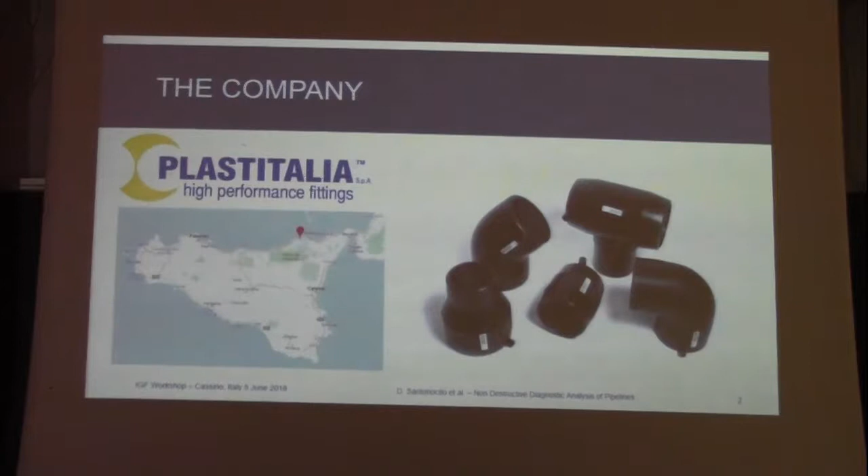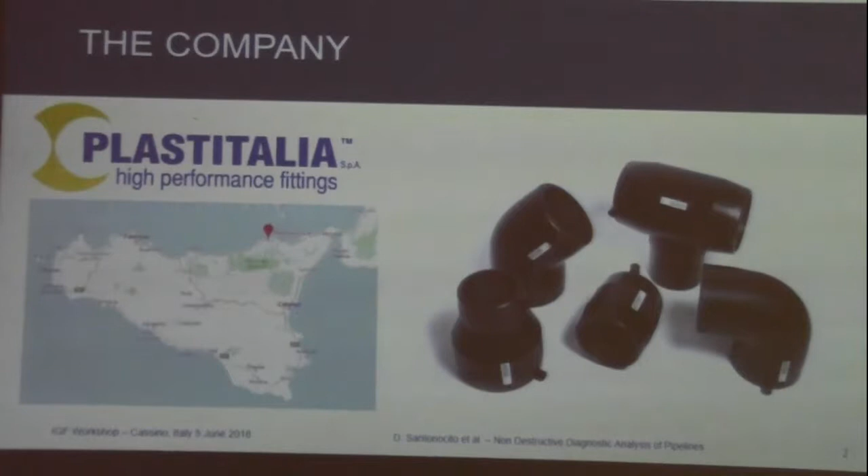This work is made together with a company, Plastitalia. Plastitalia is a European leader in the design and manufacturing of fittings for pipelines of water and gas distribution. Its headquarters is in Brolo, Messina.

The aim of our study is to specify a design strategy to avoid leakage on flange joint coupling, because we have a flange joint with different materials: the stub made with polyethylene 100 and the flange made in steel. So we have the coupling between different materials, and also the changing over time of the mechanical properties of the polyethylene, and also a possible fatigue effect due to the changing working pressure condition of the pipeline, for example ram effects, that can affect the property of the pipeline and also of the flange joint.

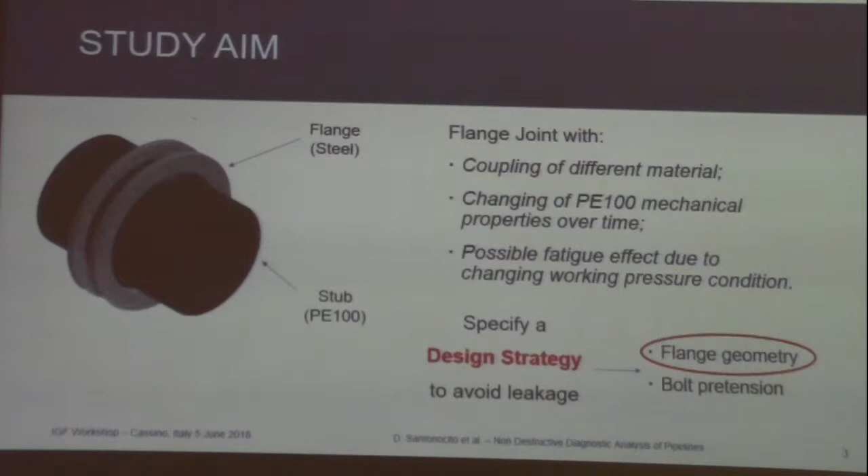So the design strategy had to state the flange geometry and also the bolt pretension. Today I will focus on flange geometry. There are a lot of reference standards that tell us how to design a flange joint, but none of these standards tell us how to design a flange joint with mixed materials. So there is the problem of how to design this mechanical coupling.

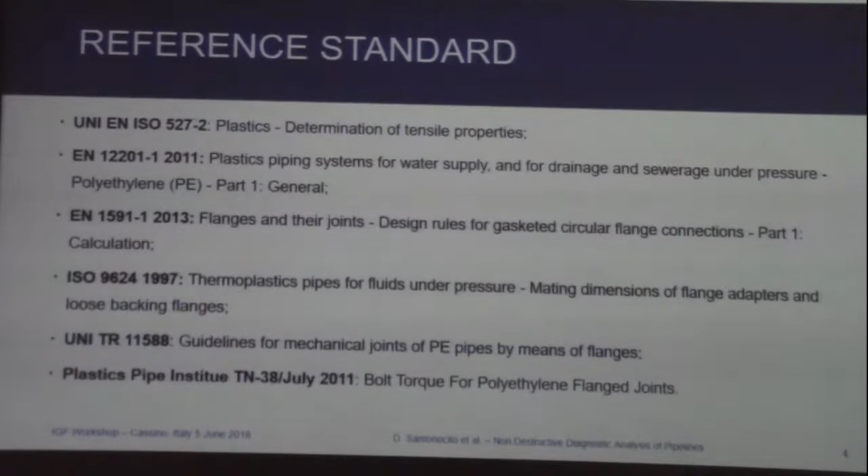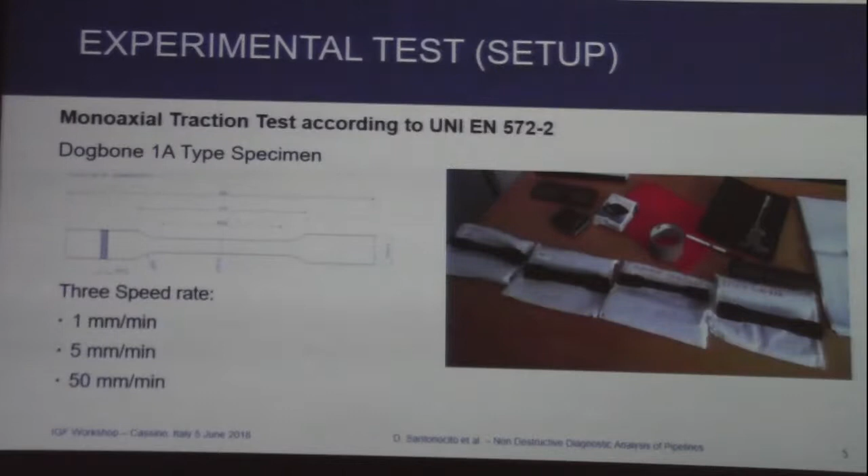In the first part of our study, we carried out a monoaxial traction test according to the standard UNI EN ISO 527 part 2, using a dog bone 1A type specimen and using speed rates of 1 mm per minute, 5 mm per minute and 50 mm per minute. We carried out our tests with 4 types of polyethylene provided by 4 different manufacturers: Eltex, Borsafe, Hostalen and Sabic Vestolen. We used a test machine Ital Sigma 25 kN.

Each set of specimens per manufacturer is composed of 11 specimens. 4 tests were carried out at 1 mm per minute, 3 tests at 5 mm per minute, and 4 tests at 50 mm per minute.

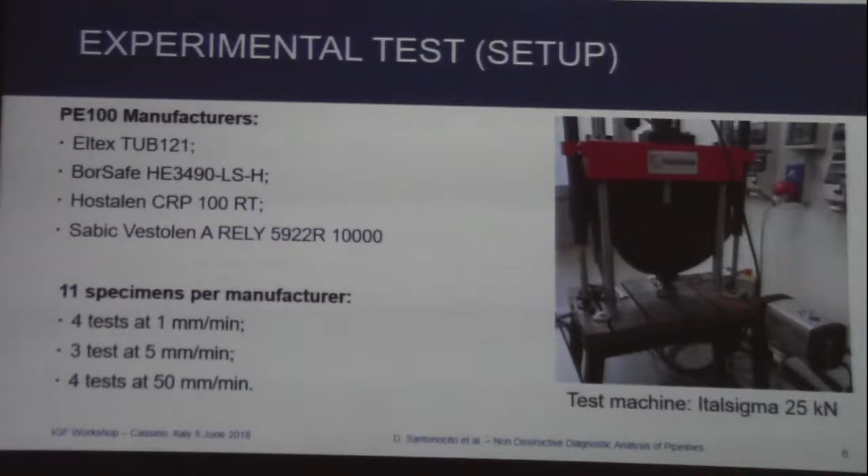In this table there are the test results, where we can see the different speed rates and the values we obtained of the Young modulus and the yield stress. A set of tests was conducted at the laboratory of the University of Messina, the other one at the Plastitalia laboratory.

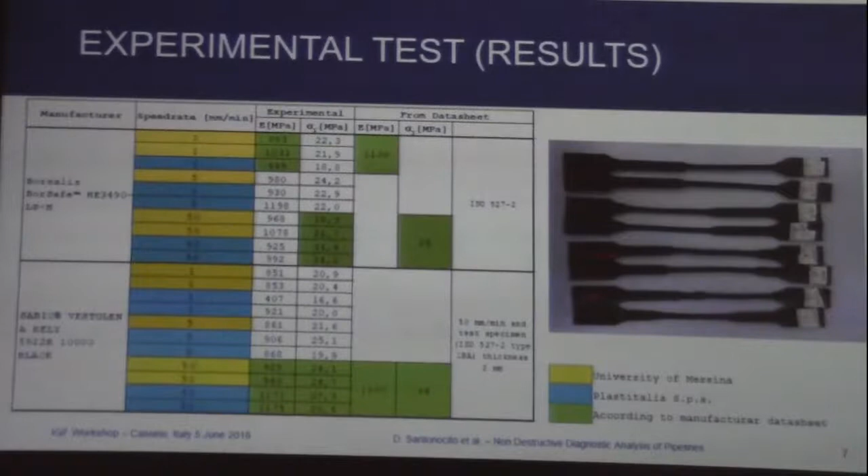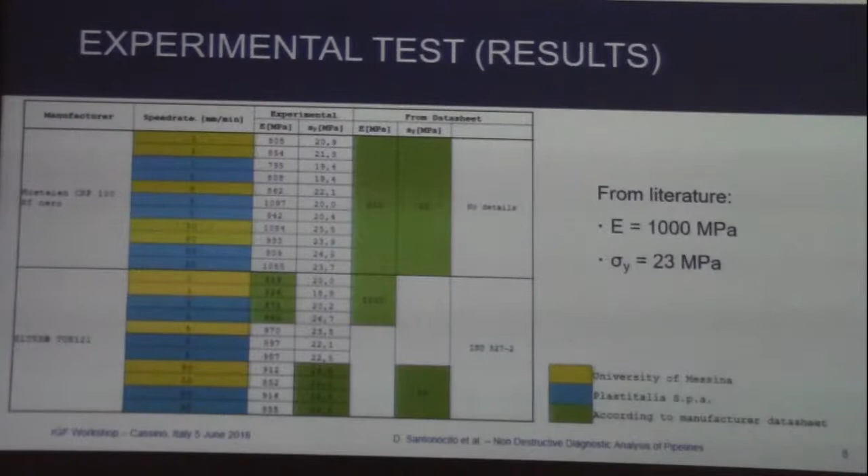As we can see from the green cell, we have the value according to the specific data provided by the datasheet of the manufacturer. Some manufacturers provide the standards used to make the test. Someone else, like Hostalen, didn't provide any details about how the test was conducted. From literature, we have a Young modulus of 1000 megapascal and a yielding stress of 23 megapascal.

As we can see from these charts, the higher the speed rate, the higher the value of the Young modulus and the yield stress, for all four manufacturers.

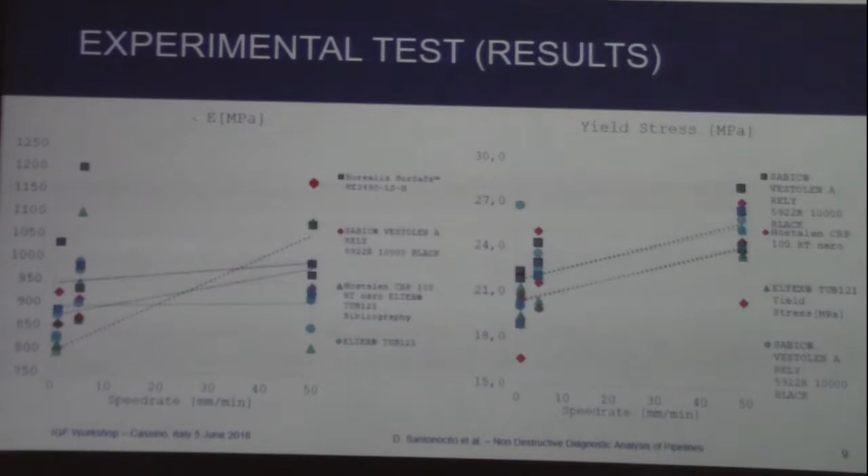Here we have a comparison between the literature data of the Young modulus and the experimental Young modulus we found in our experimental test. As we can see, there is an appreciable data scattering between the values. The same with the yield stress.

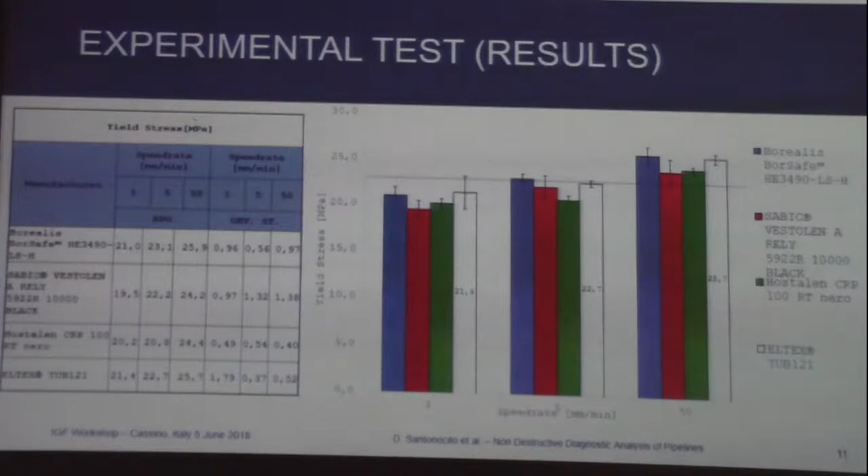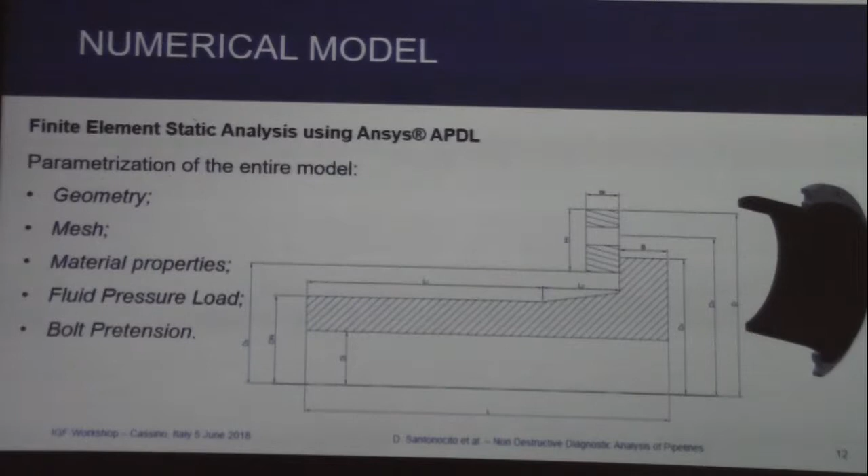In the second part of our numerical model, a finite element static analysis was conducted using ANSYS APDL. We realized an entire model with parametric geometry, mesh, material properties, and also parameterized external loads, like fluid pressure load and bolt pretension.

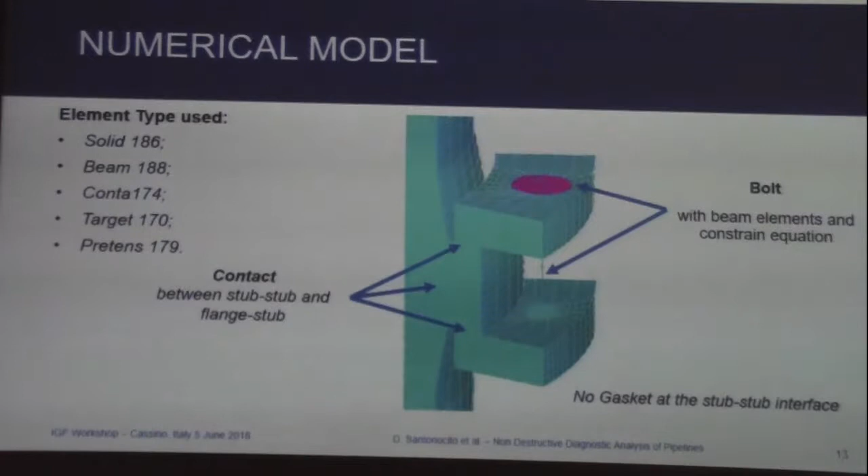We used several types of finite elements, like solid 186 for modeling the stub and the flange solid part, beam 188 for modeling the bolt, contact 174 and target 170 for modeling the contact zone between the stub and flange contact, and at the end, the Pretens 179 to model the bolt pretension. No gasket was modeled at the stub interface.

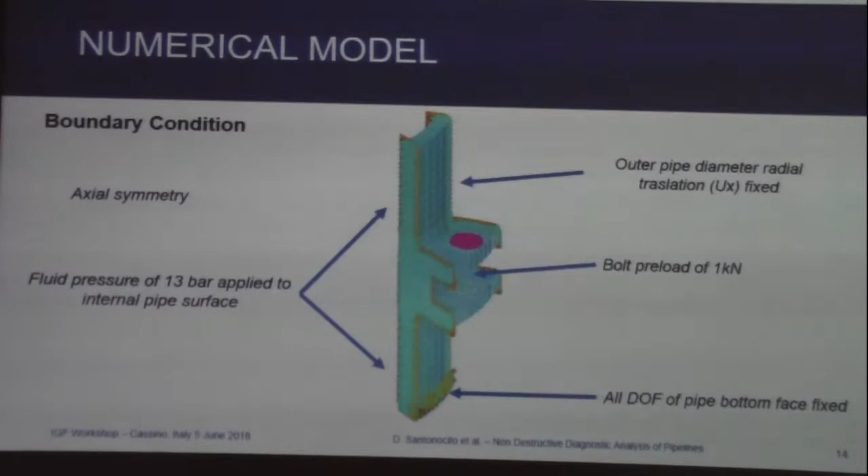Regarding the boundary condition, we took advantage of the axial symmetry of our structure. We applied a fluid pressure of 13 bar to the internal pipe surface in order to simulate the ground behavior. We fixed the radial translation of the outer diameter pipe, and also fixed the bottom face nodes of the external pipe, and then we applied a preload of 1 kilonewton.

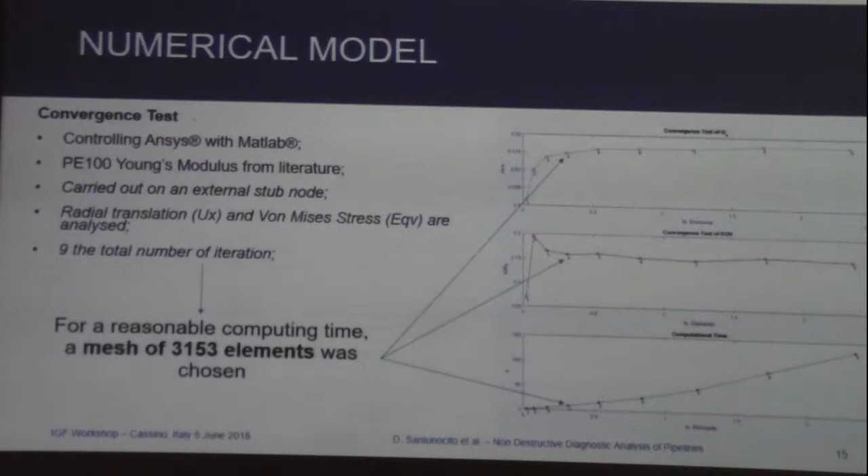Then we made a convergence test, controlling ANSYS using MATLAB. We used the Young modulus provided from literature data. The convergence test was carried out on the external node of the stub surface, and we analyzed the radial translation and the von Mises equivalent stress. We carried out a total of 9 iterations, and for a reasonable computing time, we used a mesh of 3,153 elements, with a computational time of about 20 seconds, in order to reduce the computational time of the overall iteration procedure.

Later, a sensitivity analysis of 3 geometric parameters was conducted as suggested by the Plastitalia technicians, in order to investigate the influence of the geometry parameters on the behavior of the model.

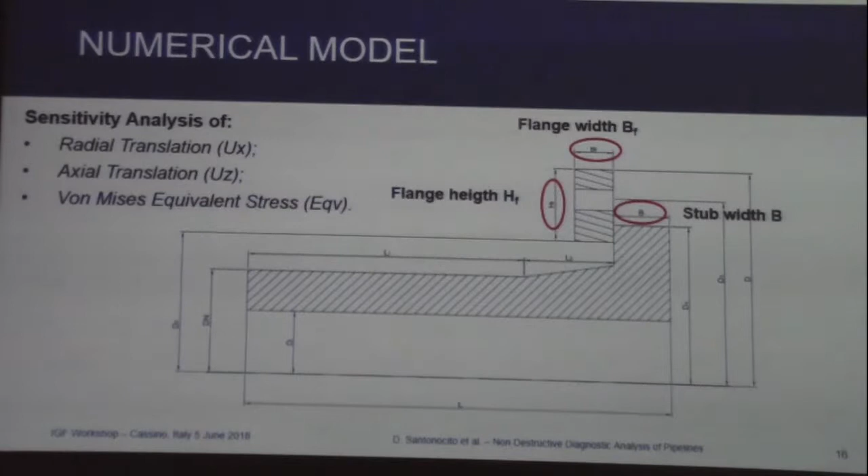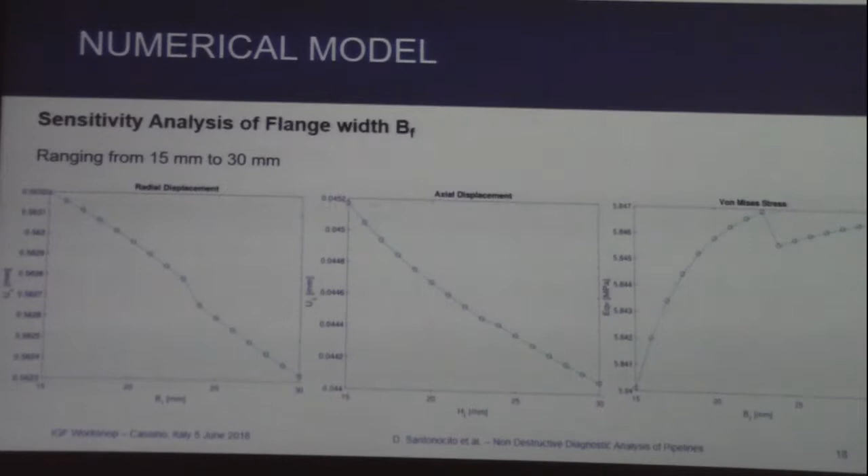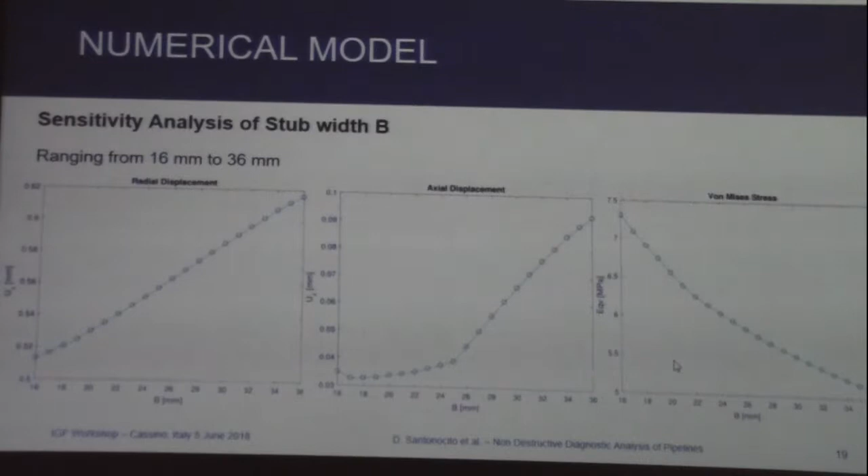While for the stub width, we can appreciate an increment of the radial and axial displacement increasing the width of the stub, and a decrease of the equivalent stress in the stub. Here is a comparison between the distribution of the von Mises stress in the stub and the flange at different values of width.

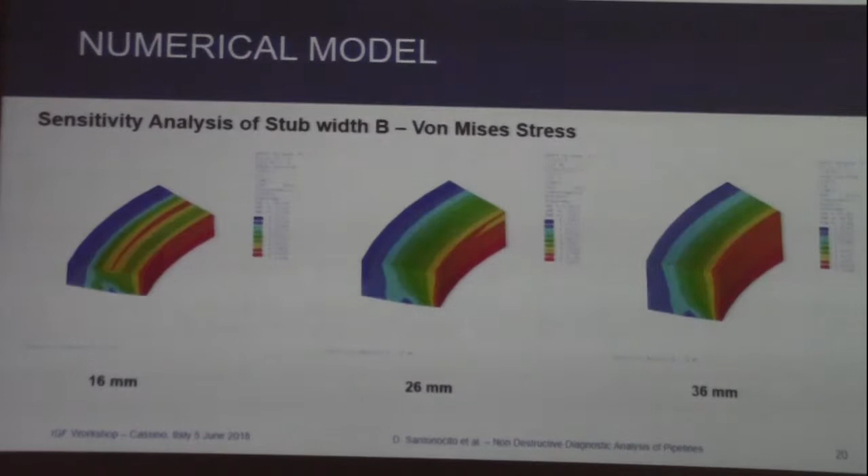At the end, a sensitivity analysis of the different polyethylene provided by the different manufacturers was conducted, and there is no significant difference in the general behavior of our model.

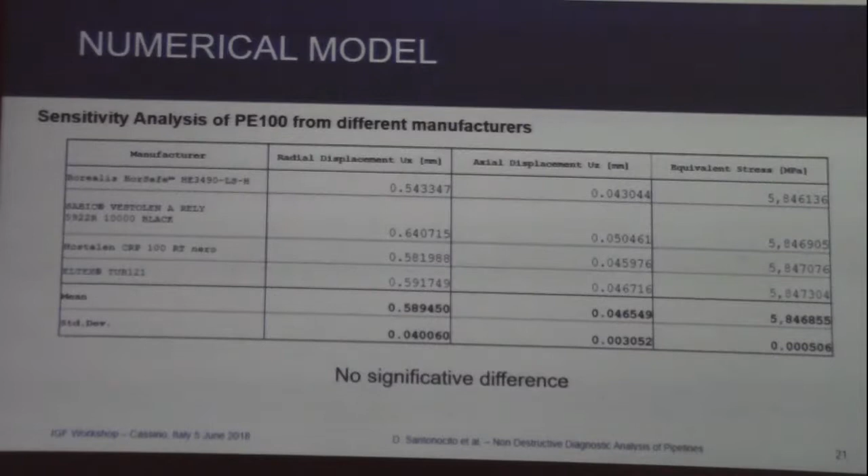So, in conclusion, mechanical properties of polyethylene from different manufacturers were investigated and compared with literature data. A parametric finite element model of the flange joint was developed, and a sensitivity analysis of some geometric parameters was conducted in order to establish the influence of the geometry on the distribution of stress and displacement over the flange.

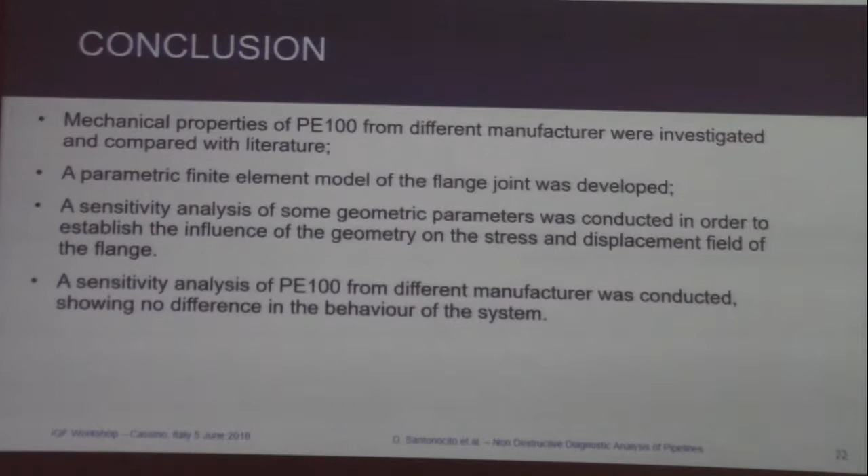And at the end, a sensitivity analysis of the polyethylene from different manufacturers was conducted, showing no difference between the different manufacturers of polyethylene. Further study will include an investigation on the mechanical properties of aged polyethylene 100, in order to establish the behavior of the flange joint over time, an investigation of the fatigue behavior of the same material, and also a study of the optimal geometric configuration of the flange joints by means of an optimization algorithm, and also a study of the pretension of the bolt.